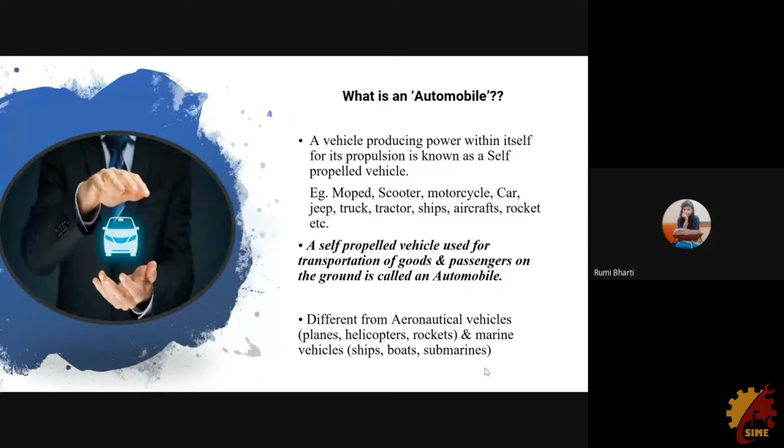Automobile and IC Engine Workshop. This workshop is designed to provide an insight to the basics of vehicle dynamics, IC engine working, and various other automobile engineering aspects. So, in simple words, if I define automobile, it's a wheeled vehicle that carries its own motive power unit, that is, its engine, and is used to transport people and items from one location to another.

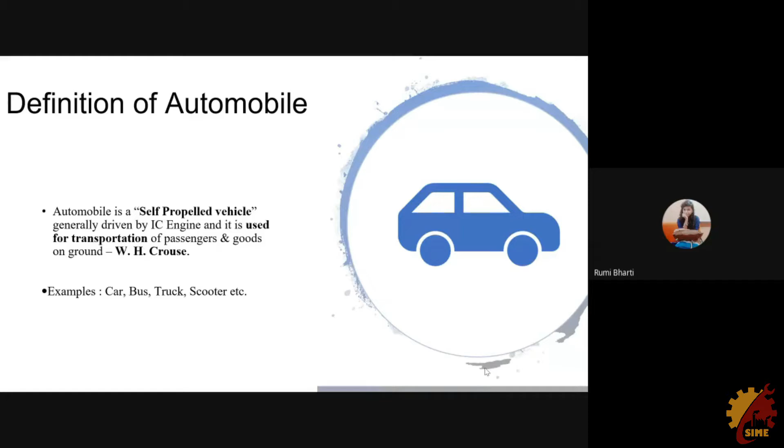It is also known as self-propelled vehicle because it produces power within itself for its propulsion, generally driven by IC engine. Some examples can be cars, buses, trucks, tractors, etc. Coming to the history of automobile, the original idea of automobile cannot be attributed to one single individual. Most historians agree that Nicolas Joseph Cugnot of France was the constructor of the first true automobile.

Cugnot's vehicle was a huge, heavy, and steam-powered tricycle, and his model of 1769 was said to have run for 20 minutes at 3.6 km per hour while carrying 4 people and to have recuperated sufficient steam power to move again after standing for 20 minutes.

Carl Benz was a German mechanical engineer who designed and built the world's first practical automobile to be powered by an internal combustion engine. In 1886, he drove the first automobile in Mannheim, Germany, reaching a top speed of 16 km per hour. The automobile was powered by a 0.75 horsepower, one cylinder, four stroke gasoline engine. This was the day the automobile was born. 1886 marked the beginning of the so far 130-year-long success story of Mercedes-Benz.

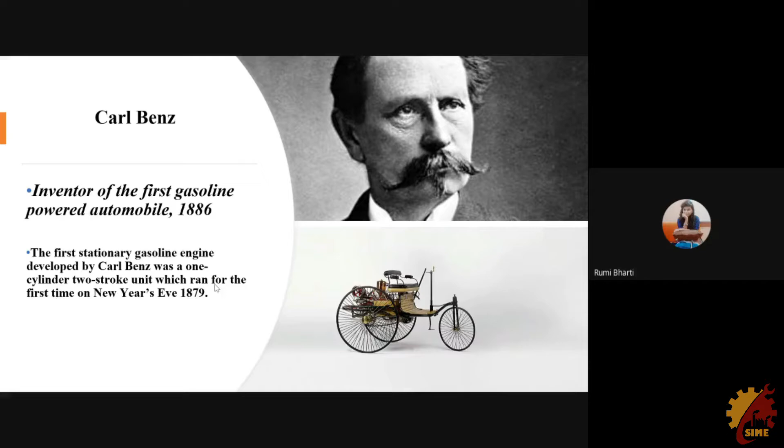Automobiles can be classified into several types based on many criteria, such as on the basis of purpose, they can either be used for carrying passengers, example cars, buses, or for goods, example trucks. On the basis of fuel used, petrol vehicle, example motorcycle, scooter, diesel vehicle, example trucks, buses, electric vehicle, which use battery to drive, steam vehicle, that uses a steam engine, but these engines are now obsolete. And today we also have gas vehicle, example LPG and CNG vehicles. Similarly, we have automobiles classified on the basis of construction, drive, and body.

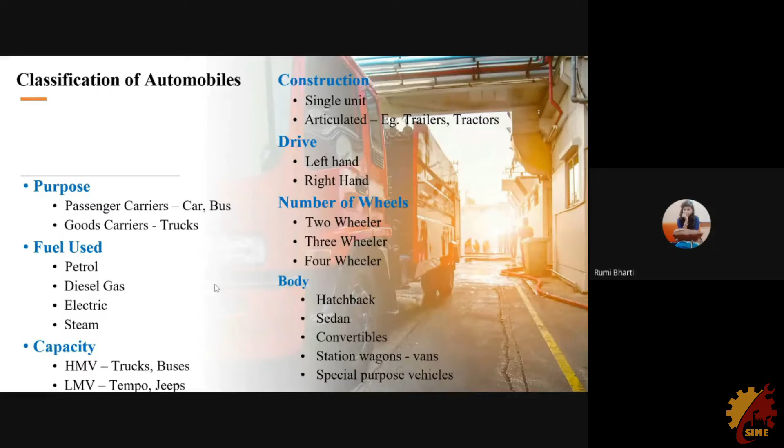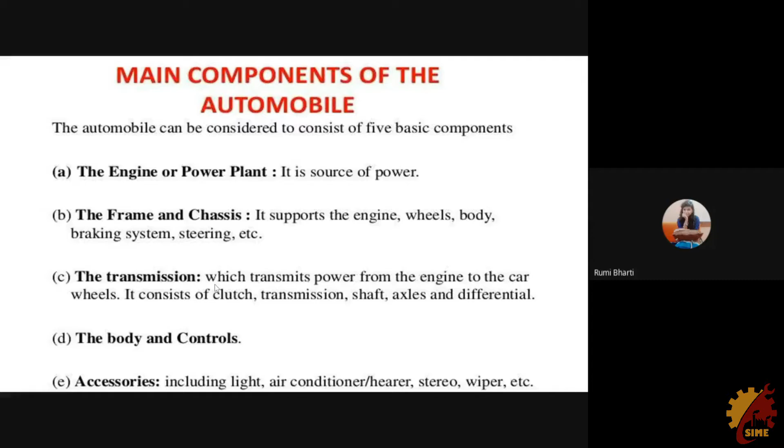An automobile has several parts, but there are 4 to 5 essential components of automobile. Engine, which is the source of motive power to an automobile. Transmission system consists of clutch, gearbox, propeller shaft, axle, a control system such as brakes and steering, and is used to transmit power from the engine to the wheels.

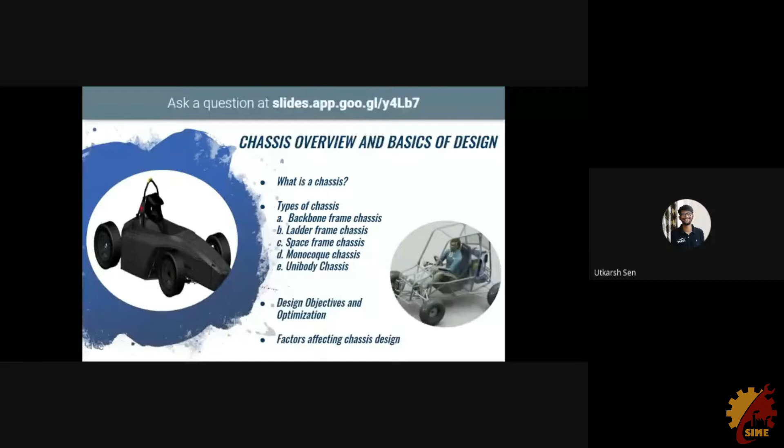We will be going through chassis functions and needs and then types of chassis. Then we will learn about design objectives and optimization. What affects the chassis design and all the types of simulation that need to be performed.

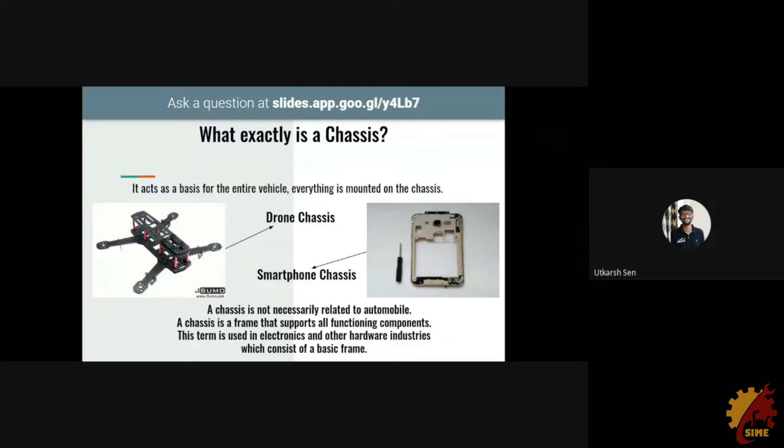You must be watching this workshop session on some electronic device. Maybe it's a laptop or smartphone. You can see the phone chassis here, okay, on the right side of the screen. What the chassis is doing is holding components like screen, battery, sim panel, camera, and more. The same thing goes with a drone and an actual car as well. Just the difference is in a car chassis, there are lots of static and dynamic loads involved in the case of automobile. The most primitive type of automobile chassis is a backbone chassis.

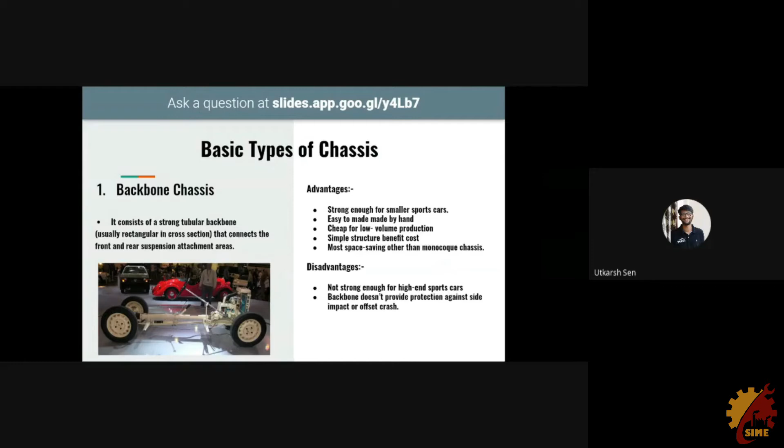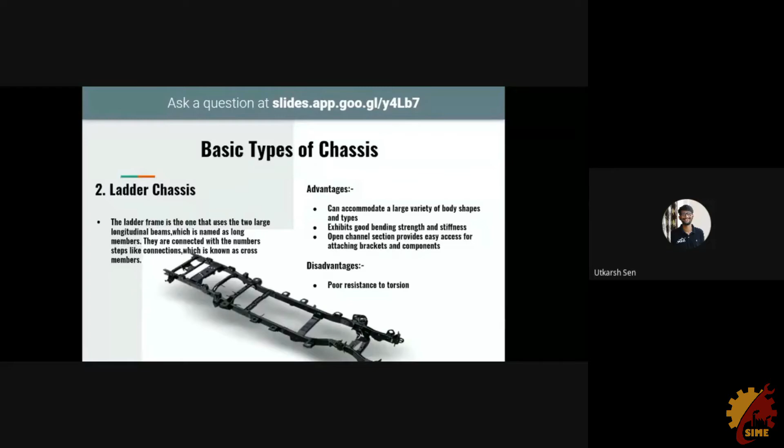And then comes the ladder chassis. It has two long beams with transverse beams. Like you must have seen trucks or buses, so they use this type of chassis, and beneath the whole body they have this type of frame. Okay, so the transverse beams are there to help in mountings and increase its stiffness. Ladder chassis is known for its high bending stiffness, and this is why it's widely used in heavyweight vehicles.

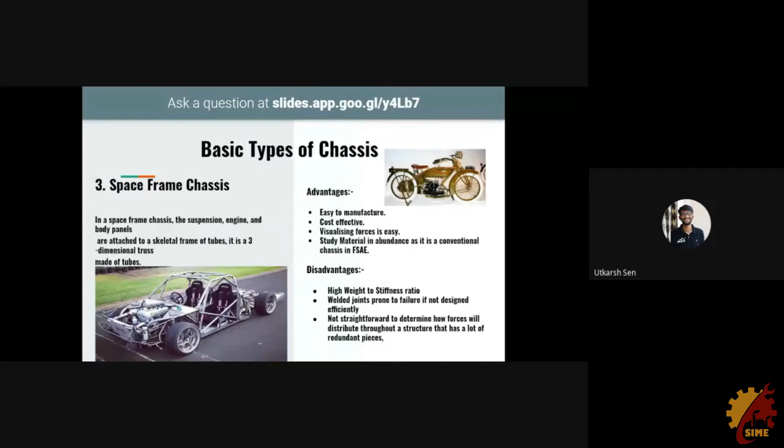Then comes the space frame chassis. This is basically formed by welding metal tubes to make a space truss kind of thing. Its torsional stiffness is better as compared to the previously shown chassis, like ladder chassis and the backbone chassis. Now comes the monocoque and unibody chassis, which is basically like a single shell kind of thing.

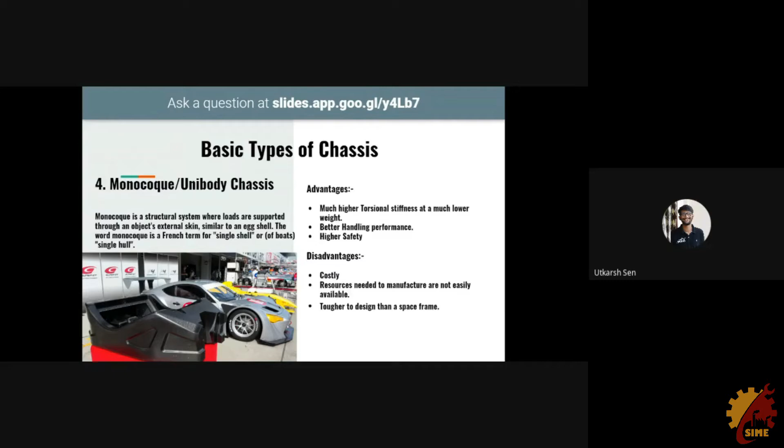Carbon fiber monocoque is famous in the racing sector. Its stiffness to weight ratio is the highest amongst all the chassis we looked at. As for advantages, it provides good safety, and its disadvantage is that it is very expensive. Here you can see the first ever carbon fiber monocoque chassis, made by McLaren, and they went on to win the British Grand Prix that season with it. So you can think how efficient this type of chassis is.

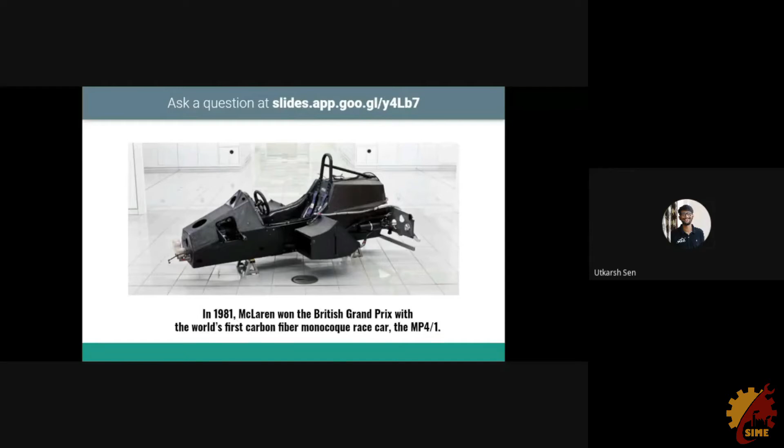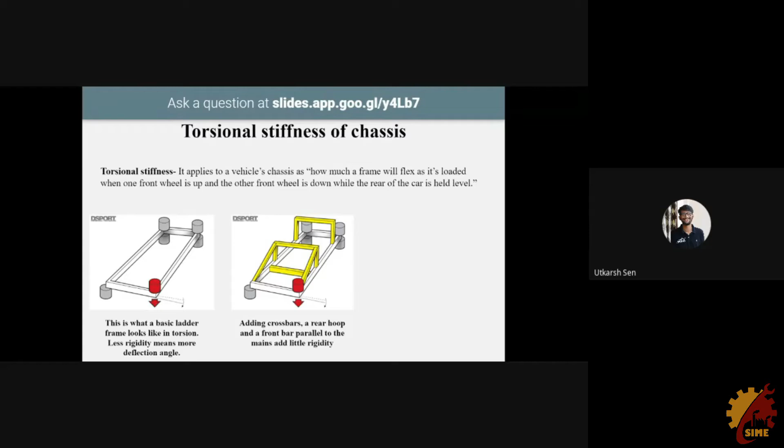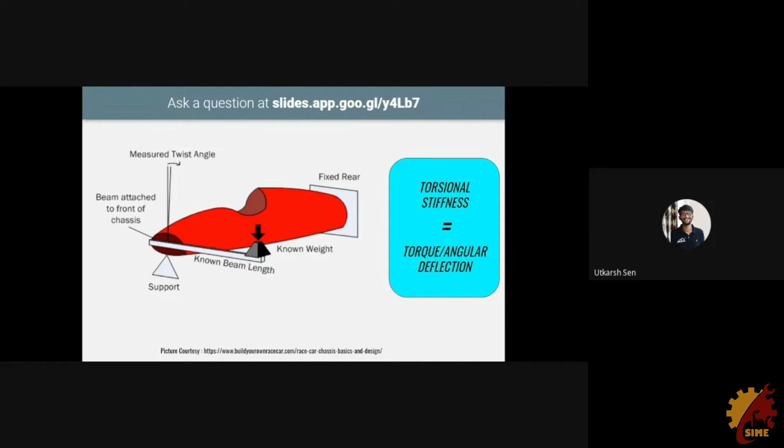Now let's understand the mathematical interpretation of torsional stiffness. It's basically torque upon angular deflection. In this figure the rear end of the chassis is fixed, and we have attached a beam to apply a load, which will be converted into torque due to its eccentricity. We know the load value and the beam length, and torque is length into force. So the torsional stiffness is P multiplied by L, divided by the twist angle.

Then comes the very famous golden ratio, which is stiffness divided by mass. We want the stiffness to increase and the mass to decrease, which will increase the golden ratio. So we can compare chassis iterations using this golden ratio. We want this to increase and this to decrease, so the whole fraction will increase.

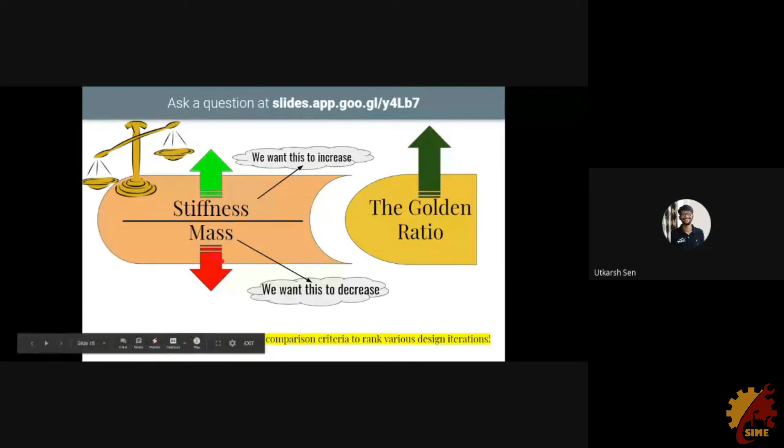Suppose you are in 1950, and you don't have any CAD or simulation software packages. You just have a pen and a notebook, and you have to design a backbone chassis with a single beam. First of all, I want to know from you guys: if I tell you to design this backbone chassis, what parameters will you design?

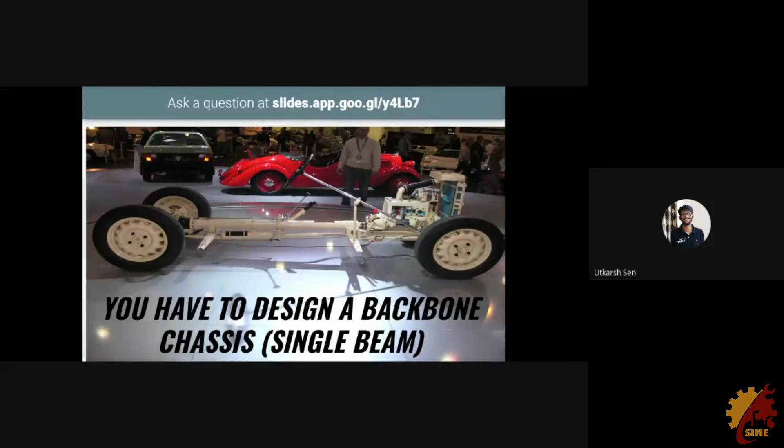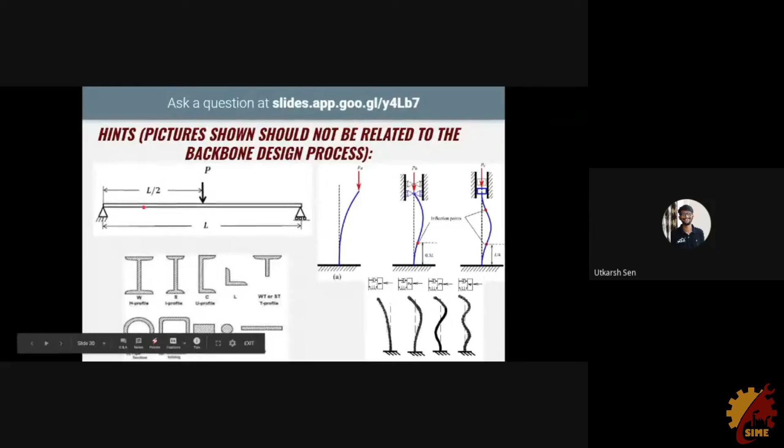It's basically resonating at its natural modes. Maybe this is mode 1, mode 2, mode 3, mode 4. So you have to calculate the first mode of this backbone chassis and know at what natural frequency this chassis is going to vibrate.

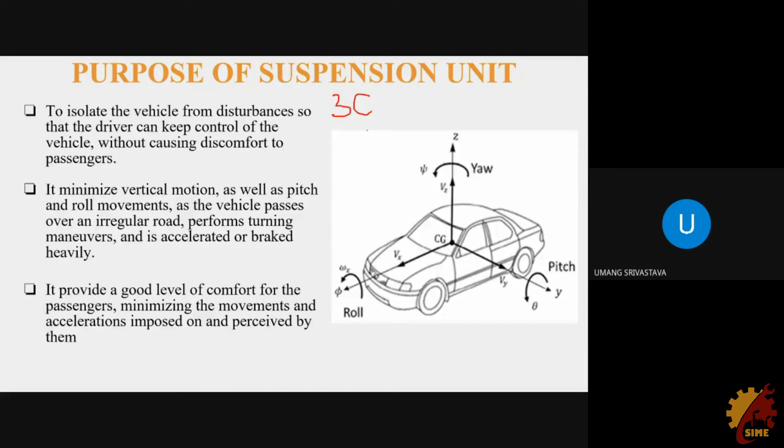The basic function of suspension is to isolate the vehicle from disturbances so that the driver can keep control of the vehicle without causing discomfort to passengers. It minimizes vertical motion as well as pitch and roll movements as the vehicle passes over irregular roads, and provides a good level of comfort. In suspension there are three words of paramount importance, the 3 C's: control, comfort, and contact. The driver should always have control of the vehicle, the tire should always be in contact with the road, and the passengers and driver should always be in comfort.

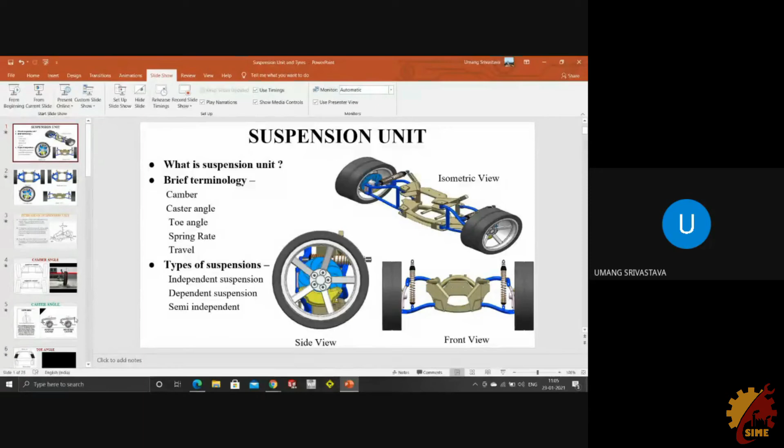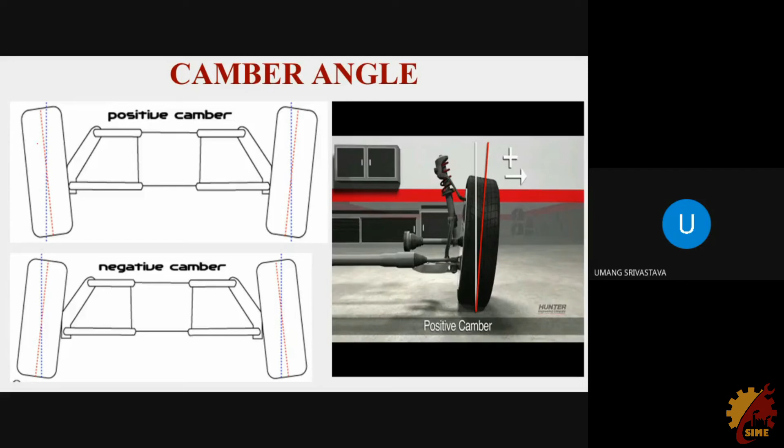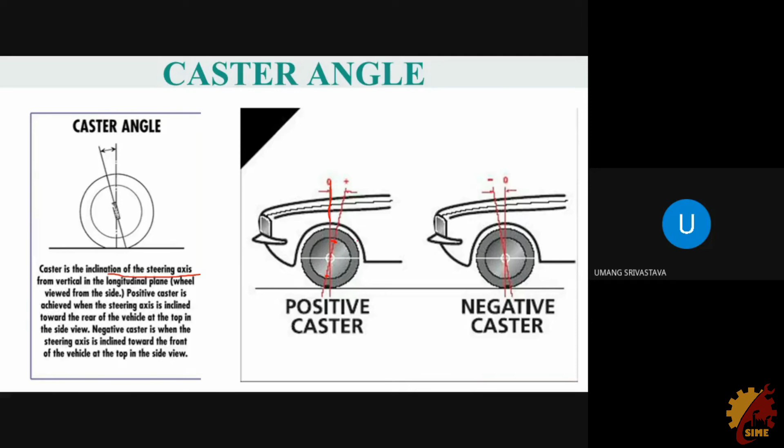Now let's start with the basic terminologies of suspension: camber, caster, and toe. Camber is the inward or outward tilt of the front tires as seen from the front. Camber can only be seen from the front. Caster is the inclination of the steering axis from vertical when seen from the side. It can only be seen from the side view. Caster from side view, camber from front view. Toe is the side to side difference between the front of a wheel and the rear of a wheel.

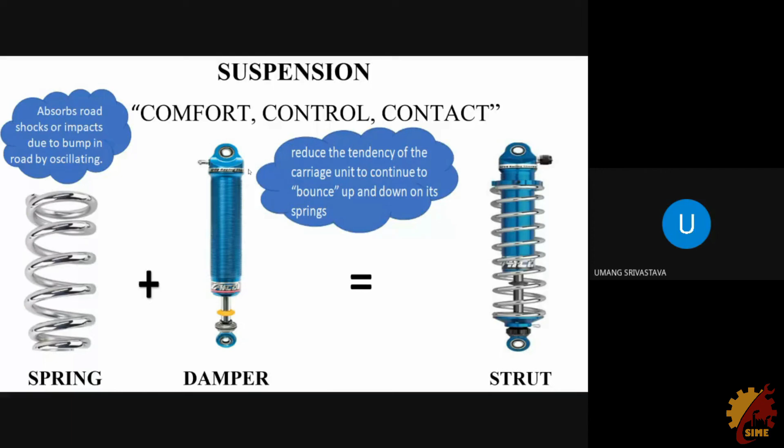Shock absorbers, as the name suggests, absorb road shocks or impacts due to bumps in the road and reduce the tendency of the car to continue to bounce up and down on its spring. Now there are basically 3 things: spring, damper, strut, and shock absorber. Tires are the most important part of a vehicle.

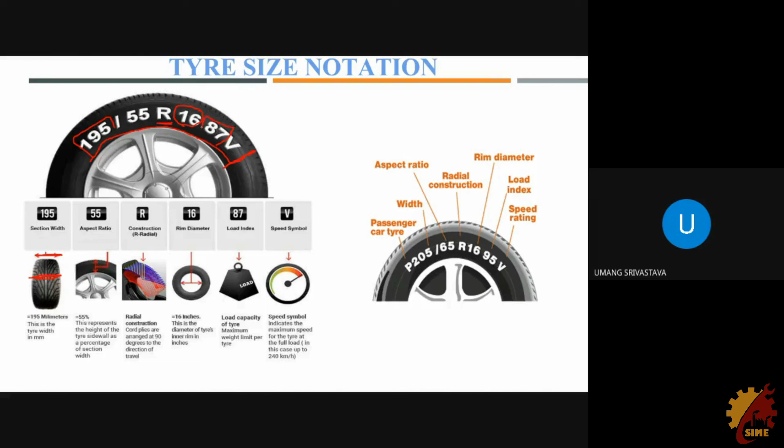Now we come to the notation of tires. First, this is the section width, the width in mm, here 195. The number adjacent to it, 55, is the aspect ratio, that is the height upon the width of the tire. Then we come to construction, which is radial or bias. Then we come to load index. This is what differentiates tires between a truck, a cycle, and a car.